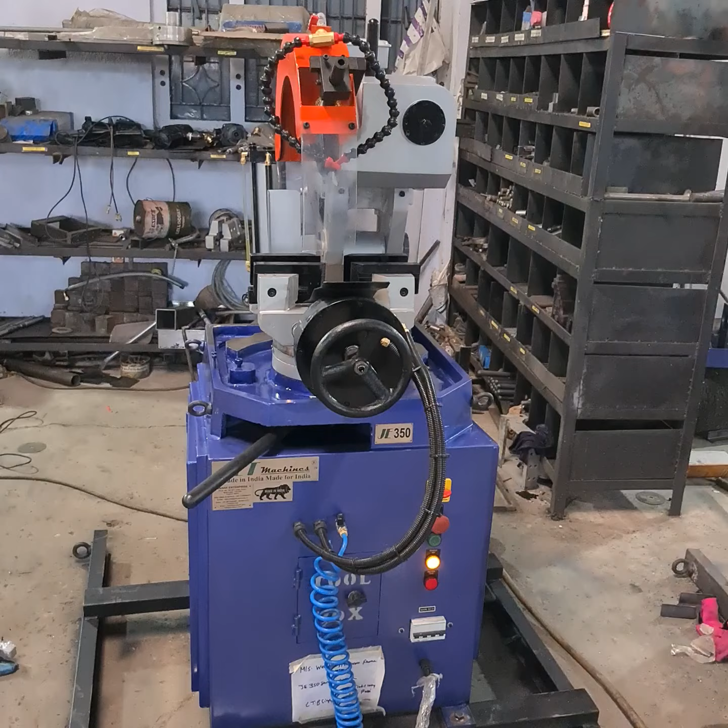Hello, this is Vipul Sanghvi from Janak Enterprises Jet Machines, Bhavnagar. We are into manufacturing of semi-automatic and automatic pipe cutting cold saw machines for the last 14 years.

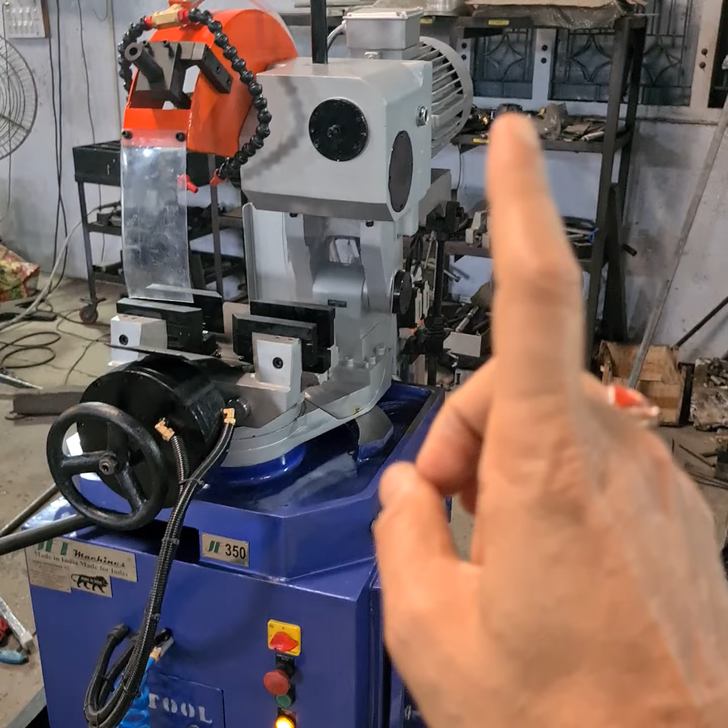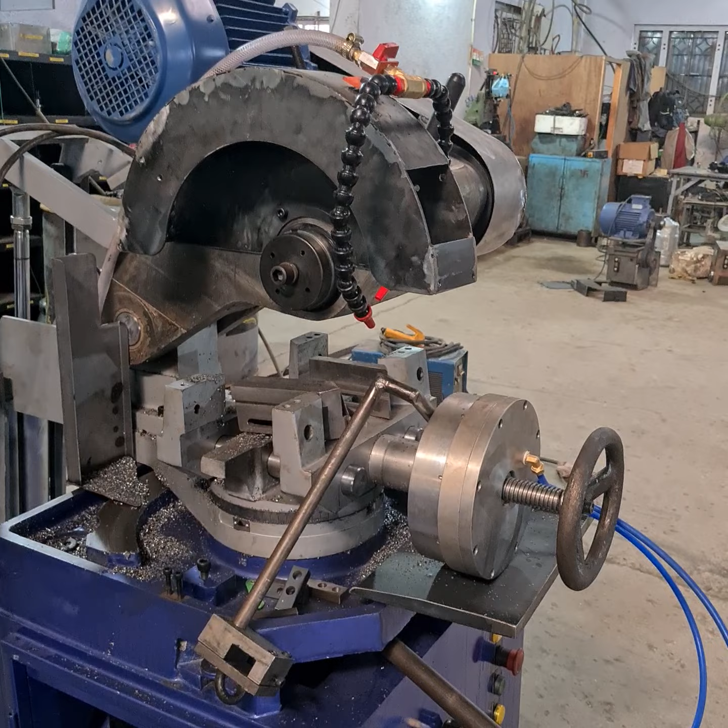Mainly, in the semi-automatic category we have three different models. One is this JE350, which is a medium duty machine. We also have one smaller model that is called JE315. Of course this is half done, and we have one heavy duty cutting machine which is JE375. This is also uncolored but it is finished.

As you could see, it's a much bigger gearbox. It's a 100 Newton meter output gearbox with parallel transmission, all helical gears, and a much bigger body and much heavier in strength. Kindly keep this machine in mind because I will give you the reference of this machine

further in the video. And for your information, we make one of these machines every day. So we produce about 25 odd machines every month.

What you could see here is a gearbox we used to manufacture about 2 years back. This has been discontinued 2 years back. This was our first initial model of JE375. This was designed by us and then discontinued by us.

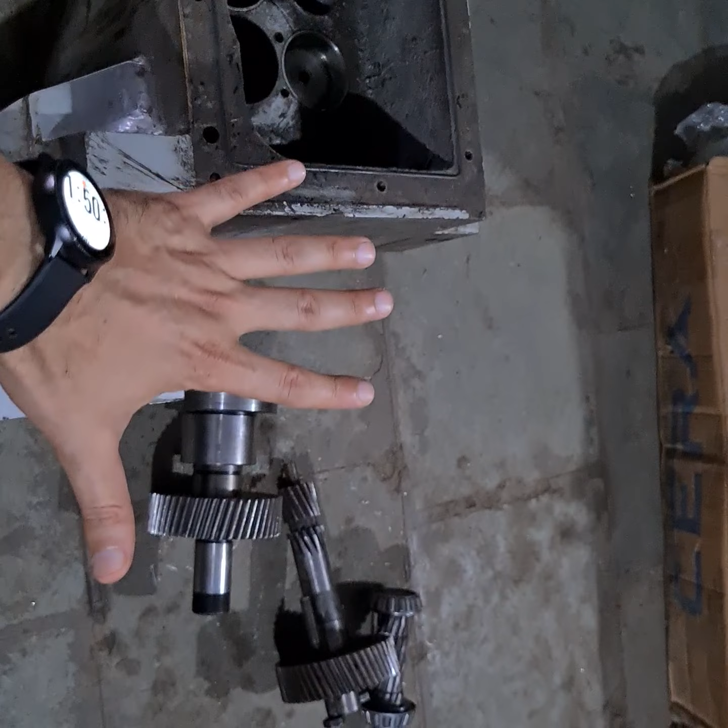During that time, one of my junior design engineers, Sohit, basically stole the drawing and tried to manufacture it himself; he took away this design and tried to do it. But coincidentally, or luckily you may say, we discontinued this machine, or this particular gearbox, immediately after that,

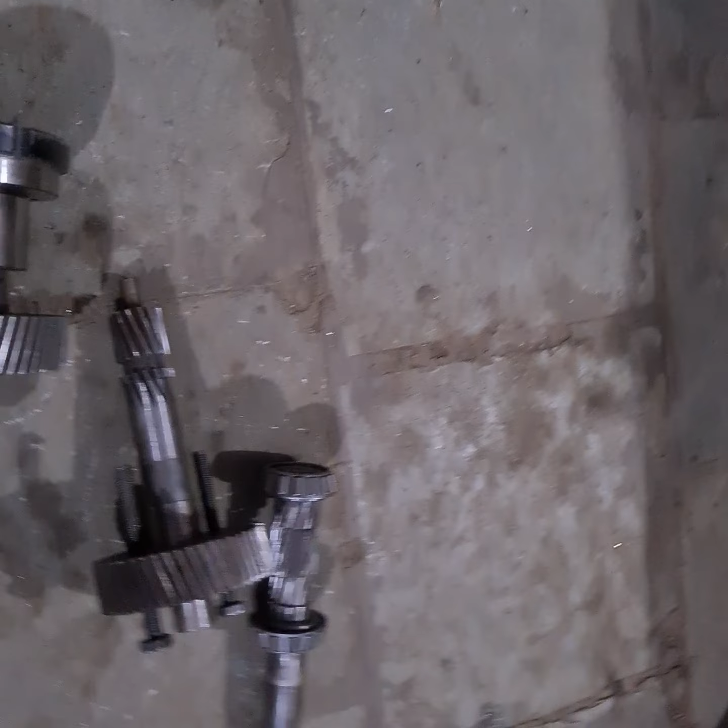due to the fact that this was our first model of 375, and we realized with the customer references that there are a lot of weaknesses in this machine. Mainly the module which we had used, and which is currently being used by Sohit 385 also, is a 2mm module. So it's too small a module to transmit a heavier torque. Also this bush was only 12mm and this module was also 2mm.

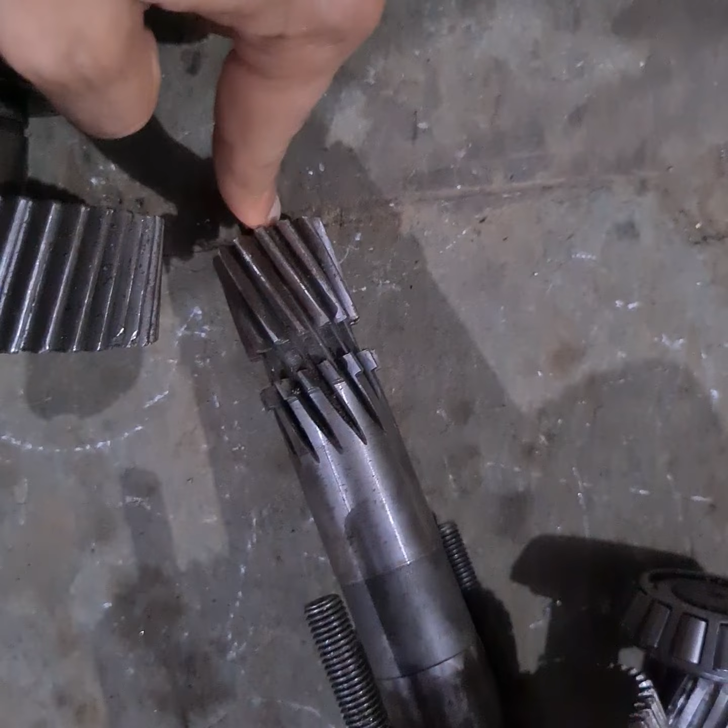Normally the problem we faced is that at the time of heavier load, these gears used to break from here, both this area, this one and this one used to break. So we discontinued this particular model, and then we redesigned our gearbox, the one that I had shown to

you. The gears which are utilized in my current gearbox, as you could see, are a much bigger, heavier structure. The bush is also far bigger. The modules are 3.5 compared to 2. It's 3.5 and 3 respectively. So the transmission is also far better. Of course, I have not shown one more transmission gear here, which comes in between, for secrecy purposes.

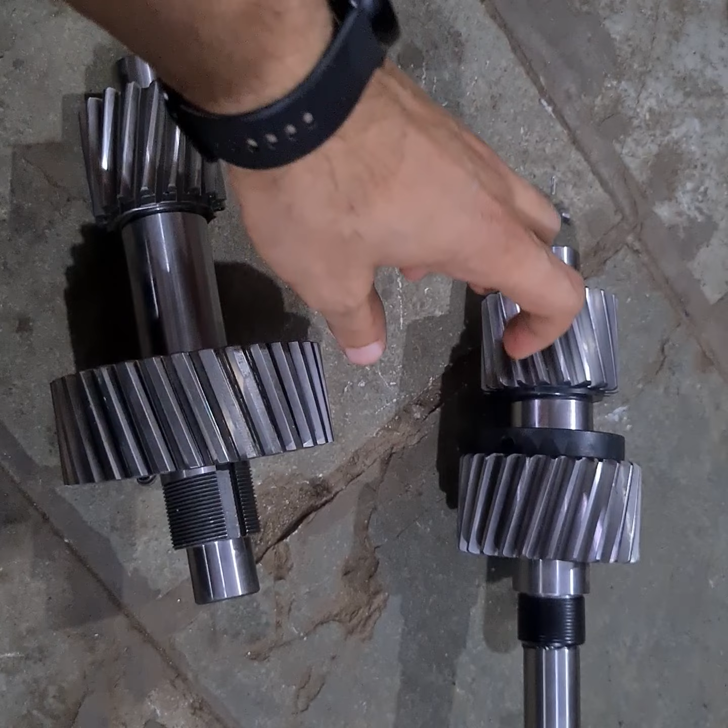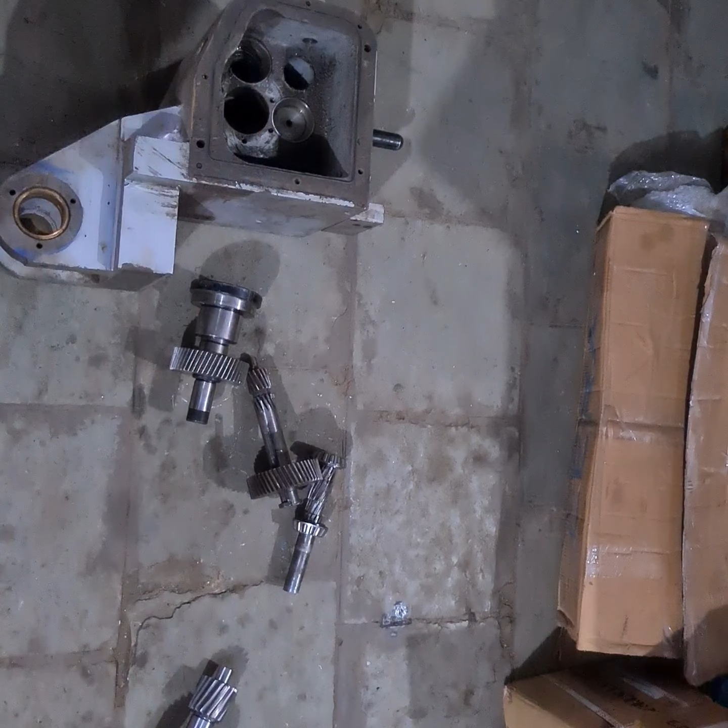But just to give you an idea, our older gearbox drawing, which is a failure drawing and is currently being utilized by the Sohit 385 machine, is not as good as what we are doing right now. So the request is not to compare my JE375 with the Sohit 385 machine, because it's a failure machine which has now been manufactured and marketed by Sohit Engineering.

To further authenticate my claim, because it was our design, our first design, we have all the information, of course all the 3D models of that same design. As you could see, this is the same model, same machine model.

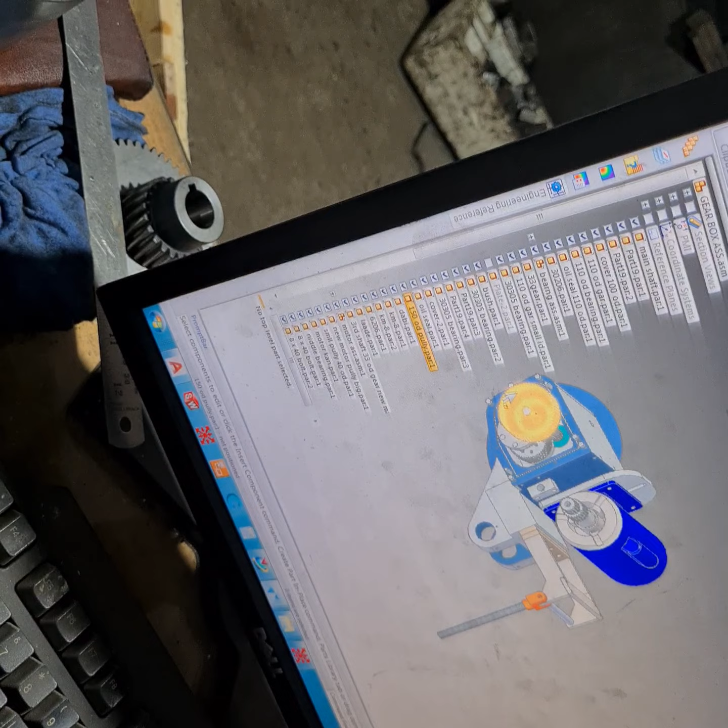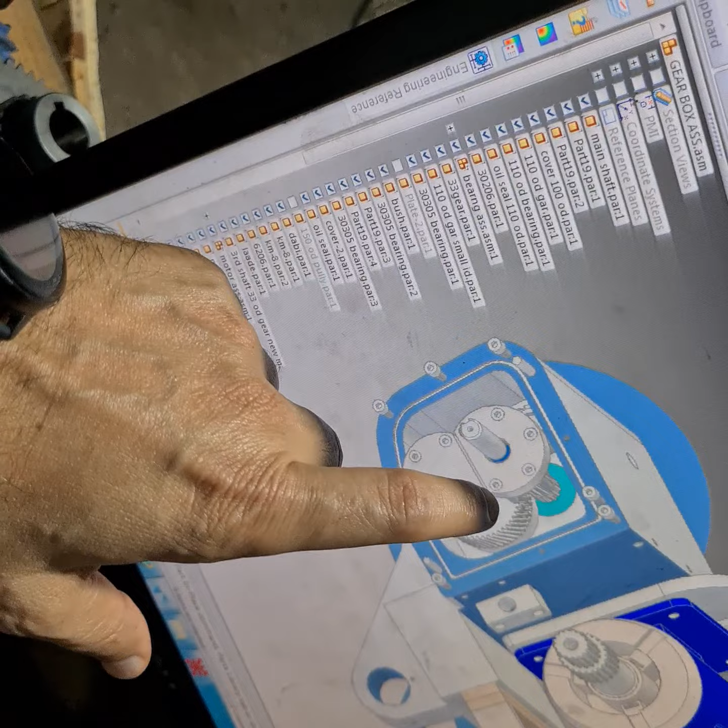This is the same model utilized by Sohit Engineering right now. As you could see, the motor is just behind the gearbox, all parallel transmission. This was our first initial design, which he actually stole and tried to make a machine. But as I rightly told you, this machine has got a lot of weaknesses. This gearbox has a lot of weaknesses.

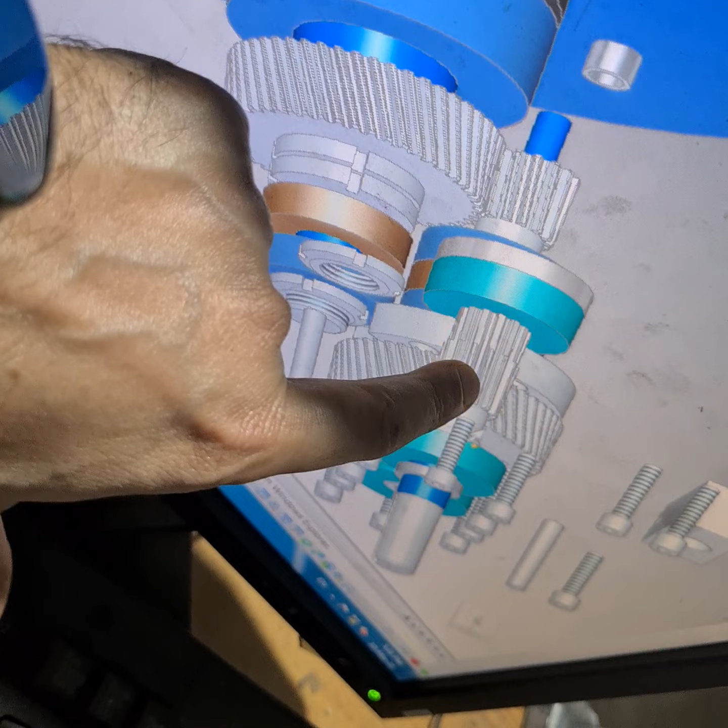This gearbox has got a lot of weaknesses. As I told you, these two modules used to break at the time of load, and even this bush used to break. So we discontinued this design.

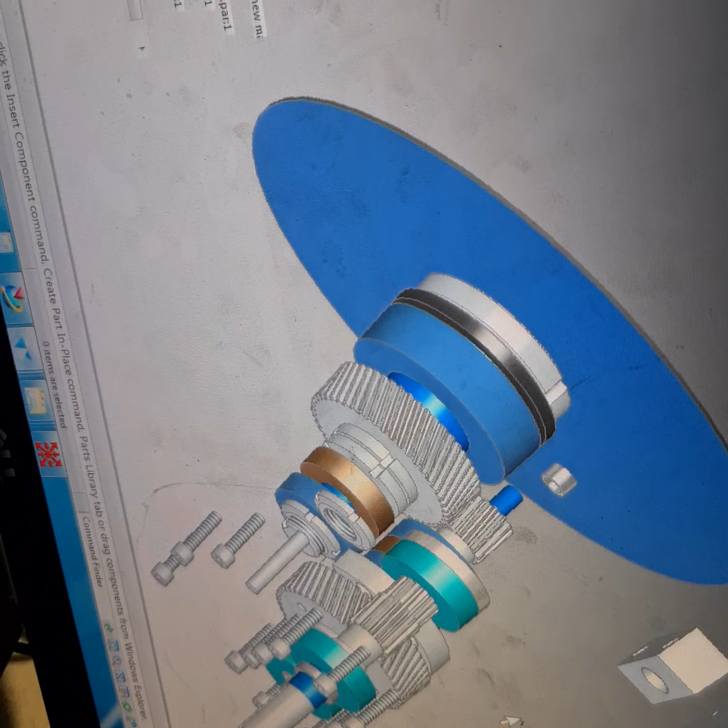This is to give you a confirmation that the design or the gearbox being manufactured by Sohit 385 was originally our gearbox, which he has stolen and is trying to make, and it's a failure design. It's a failed, discontinued design at our end, which we have now disposed of.